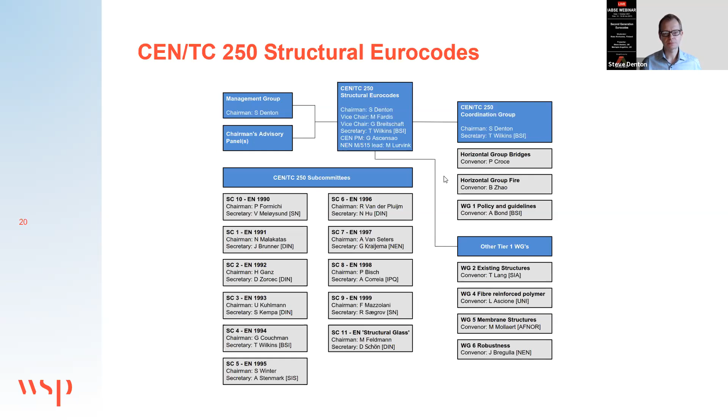Before moving on, one of the important things that I wanted to acknowledge is that the Eurocodes operate as part of a family of European standards. So the Eurocodes are the documents that cover design, but they work in conjunction with the European standards for products and European standards for execution, so construction specification documents. The interdependence and interrelationship between those different standards is very important, and something which has been a real focus for us in the evolution of the Eurocodes.

Now let me move on and just briefly talk about that point about why design standards matter, and share a little bit of my perspective on these points. As an audience that's chosen to attend this webinar, you probably share my perspective that design standards are important. But let me talk a little bit about why I think that's the case.

The first point is about impact. I've already talked about the fact that the Eurocodes are used by somewhere over 500,000 engineers. The impact of what we do is profound in developing these standards. Sometimes it feels quite daunting, but I think it's a huge privilege. How often does one have the opportunity to work on something that is going to impact so many people? Let's remember that construction represents around 10% of most countries' GDP.

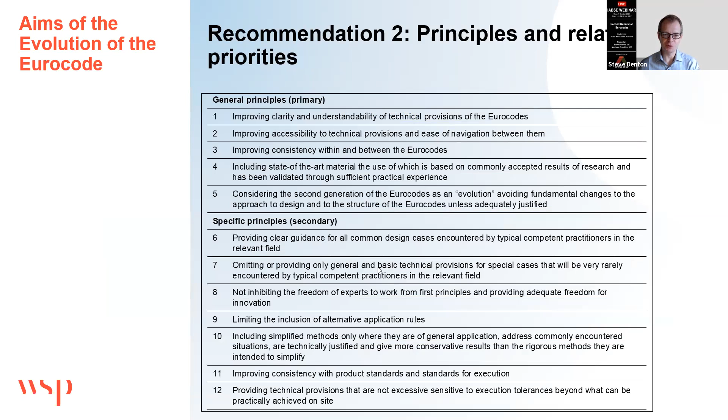Looking at those general principles first: working to improve clarity and understandability, improving accessibility, essentially ease of navigation, looking to improve consistency, looking at state-of-the-art material where importantly, what we include has been validated through sufficient practical experience, and also more broadly, recognizing the need for the second generation of the Eurocodes to be an evolution.

So there aren't too many fundamental changes, unless, of course, there's adequate justification for doing so. In some parts, the changes to the Eurocodes are more significant than in others, but in each case there is a very strong justification for the changes that we're making.

Then there's a set of secondary principles. Sometimes we find that some of these principles pull a little bit in opposite directions, and sometimes it leads to some very meaningful debates about exactly what we should be doing. But what we have done is established a framework, one that everyone has agreed, that gives us a basis upon which we can have those discussions.

And then those remaining three pillars: ease of use, strategic performance measures, management, governance, and support. There's a number of things we've done: the appointment of a technical reviewer, again through international competition, which is the role that Mario Pia has; the detailed review of deliverables; the development of guideline documents; provision of examples and advice. Mario Pia will add a little bit more detail to this.

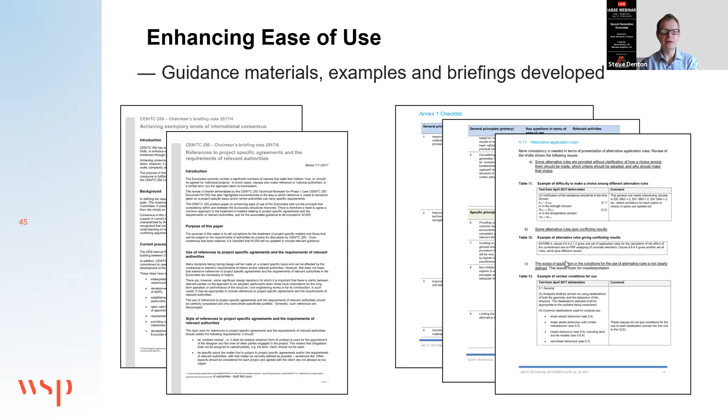We've set out a guide on what good drafting is. Drafting of standards is a very, very skilled activity. So, for example, here we set out a set of 6 tests that we ask people to ask themselves as they are working on drafting documents. Mario Pia will talk a little bit more to that when she speaks.

And what does this look like in practice? I don't have time to go through lots and lots of technical detail today, but just as an illustration of a few things that we've sought to do: on the left-hand side of the screen, you can see the text from the current EN 1990, and on the right from the inquiry draft of the new EN 1990 basis of design Eurocode.

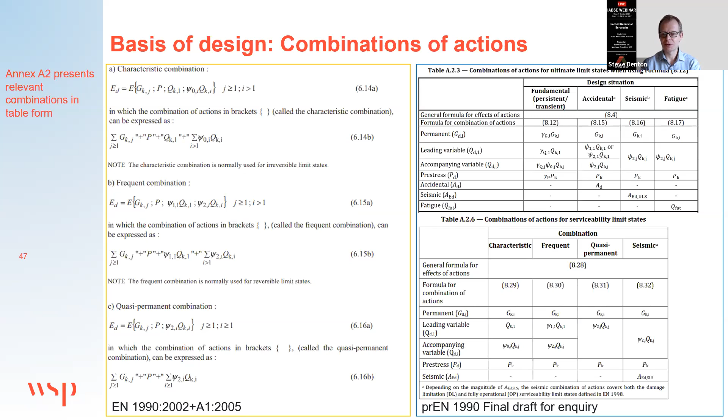One of the things we've sought to do is, we still do in the new Eurocode have expressions for how actions are combined, but we've also sought to give users something a little simpler and a little bit more intuitive in terms of providing these tables that express how the partial factors and combination factors should be constructed in different combinations of actions.

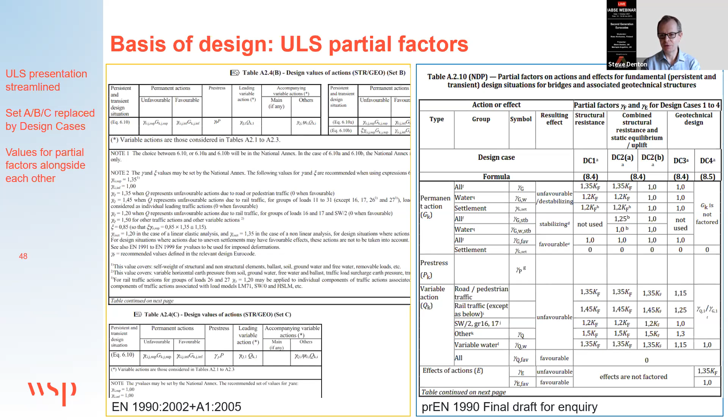Another effort to enhance ease of use has been around the way that in the current Eurocode suite, we have what are referred to as Set A, B, and C of partial factors for STR and GEO verifications. In the new Eurocode, we have created what we call design cases, so we can set out all of those factors in a single table, and the differences are then much more transparent between them.

Another illustration around consistency and navigability: in the current Eurocode suite, we introduce the possibility of differentiation of partial factors by reliability class. But at the moment, that sits within an informative Annex B, and its connection to the other parts of the document is perhaps not as clear as it might be. So in the new drafts, what we'd look to do is make that much clearer within the relevant parts of the Eurocode.

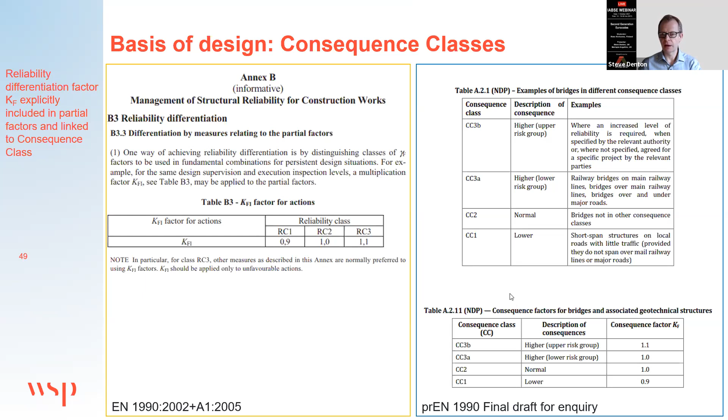I talked about that connection with product standards. For example, in connection to bridge design, a new annex deals with design of bridge bearings, which interfaces much more clearly and better with EN 1337, the product standard for bearings. We've been working well with TC 167, who have responsibility for those documents, to make sure that interface is as effective and smooth as possible.

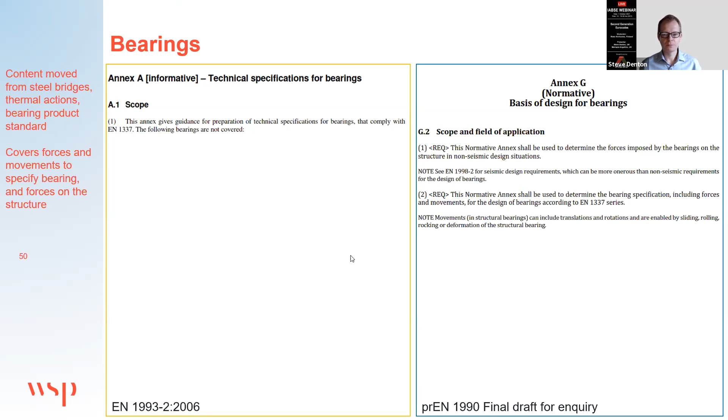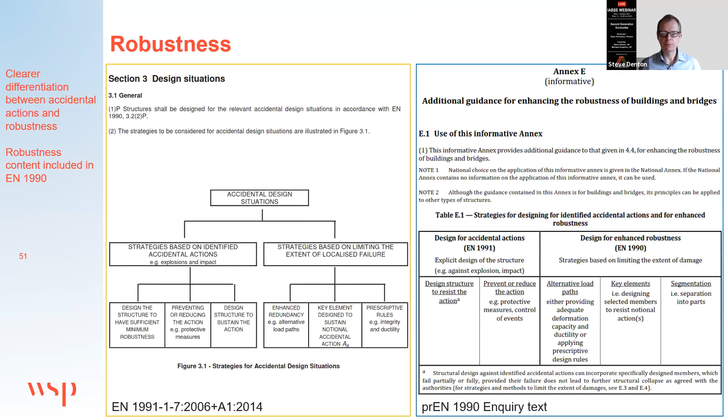Another illustration: the treatment of robustness is a really challenging area in standards. We currently set out in the existing suite a set of strategies for dealing with accidental design situations in EN 1991-1-7. Within the new Eurocodes, we're seeking to be clearer in terms of where these matters are handled from a robustness perspective in EN 1990, in contrast to dealing with defined accidental actions, which we're handling in EN 1991.

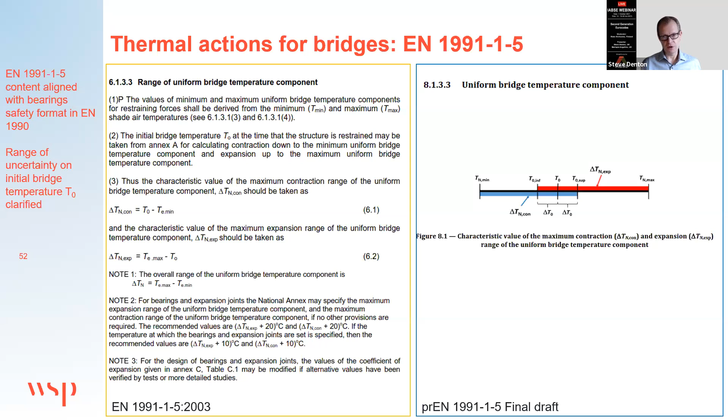Another example of things we've learned through feedback and practice: the text on the left deals with bridge temperatures, an important parameter when designing a bridge, around that temperature T0, the temperature at fixity. Of course, the practical reality is that's rarely a single number; normally when you design, you have to design for a range, otherwise you place an undue constraint on the contractor. We've sought to recognize that in the current working drafts of EN 1991-1-5.

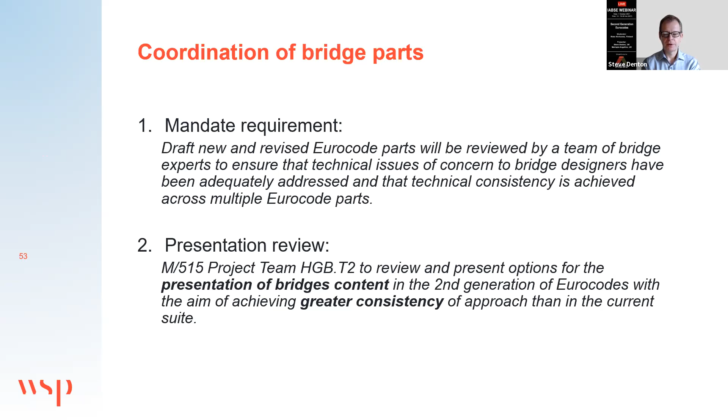One of the other things we've sought to do, and I talked about this horizontal consistency, is something a team has been looking at for the bridge-related parts, particularly how we can have the style of presentation more consistent between the bridge-related content. Many of you will be familiar with the fact that we take a slightly different approach in EN 1992 for concrete at the moment than we do in 1993 for steel, 1994 for composite structures, and 1995 for timber.

The approach, the presentational style, where we have bridge-related content that extends, modifies, augments, or replaces existing content applicable to building structures, the way we do that has been a little inconsistent. So we've developed guidelines for doing that on a more consistent basis. There have been challenges and long discussions, for example, about where that content should be housed.

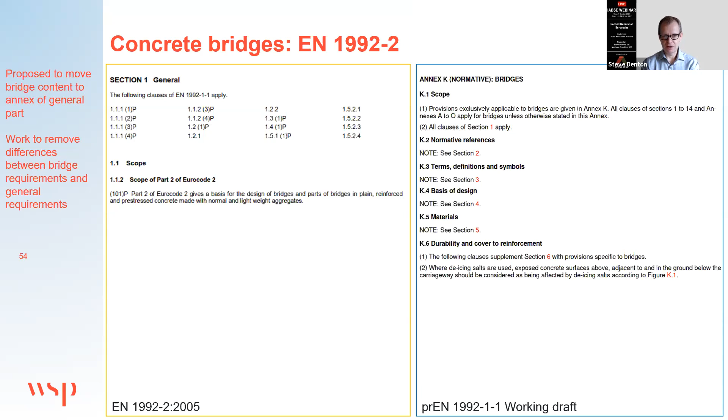Actually, what we found during the review process is that quite a lot of content that was in some of the bridge parts can be applicable to other forms of structures, and a lot of that has migrated into the general parts for the second generation of the Eurocodes, meaning the bridge-specific material in some cases is much shorter. As a consequence, we've agonized long and hard, but come to the conclusion that certainly for concrete structures, it makes more sense for that material to be contained within an annex rather than a separate part. That was a long debate around the right way to handle that.

So that's a little bit of an illustration of what we've been doing in terms of enhancing ease of use. Again, Maria-Pia will talk a little further to that.

Let me talk then about achieving exemplary levels of international consensus. It's my job as chairman of a CEN technical committee to abide by this part of the CEN internal regulations. I have to confess, when I first read this, I'm not sure whatever it was, 12 or so years ago, but I don't think I really understood that.

In a way, this sense of trying to achieve consensus versus unanimity is something we've really evolved in how we approach within TC250, in a very constructive fashion. What consensus means is arriving at a point where, although the outcome may not be everyone's number one preference, it's a position everyone can stand behind. So in the end, you hopefully get unanimous support, but it's unanimous support based on a consensus position that everyone can support, rather than necessarily everyone's number one preference.

We have set out how we will work to achieve that, including position papers that have been unanimously endorsed by all of the CEN members around how we will work together and the steps we will take to try to find that path to achieve consensus.

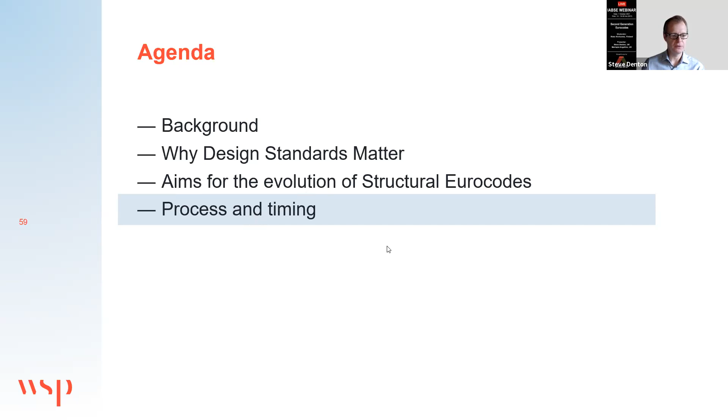A key step in the evolution of the Eurocodes in the second generation was the European Commission issuing CEN Mandate M515, which set out a basis for a funding agreement to support the evolution work. We responded with a technical response, with over 1,000 experts involved in producing it. That response included our proposals for the work to be done, mapped against a series of tasks and subtasks, contained within 4 overlapping phases, so lessons learned could inform the process. There are interdependencies within the suite, and certain documents needed to be handled first so that changes in those documents could inform others. The work needed to be staggered in overlapping phases, because otherwise the program would have been too long.

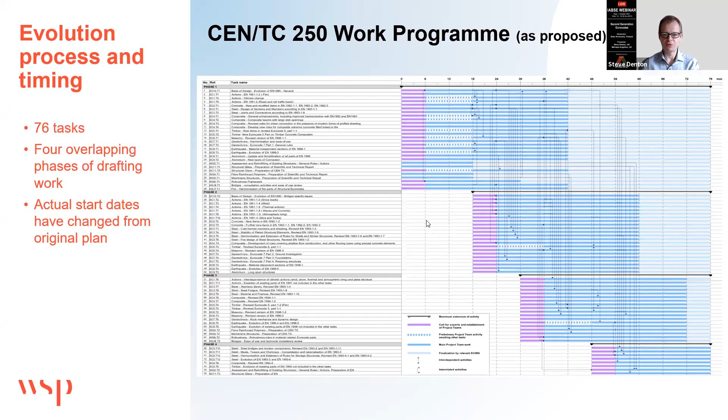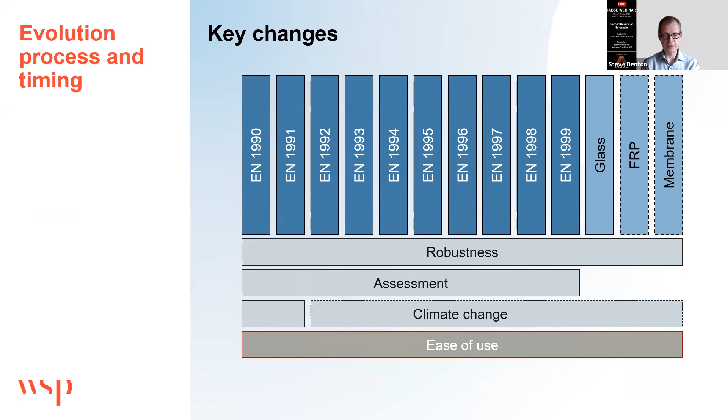In terms of key changes to all of the Eurocodes themselves, there's also the addition of initially technical specifications, but in due course there will be standards on structural glass, on FRP, on membrane structures, work on robustness, work on the assessment and retrofit of existing structures, work around climate change, and ease of use as a key driver for us.

The work we've been doing has not just been a response to that top-down mandate, which defined a series of targets for us, but we've also undertaken systematic reviews of all of the Eurocode parts. All of the CEN members have had the opportunity to comment on the existing standards, and all of this has fed together into the work we've been doing on the evolution of the Eurocodes.

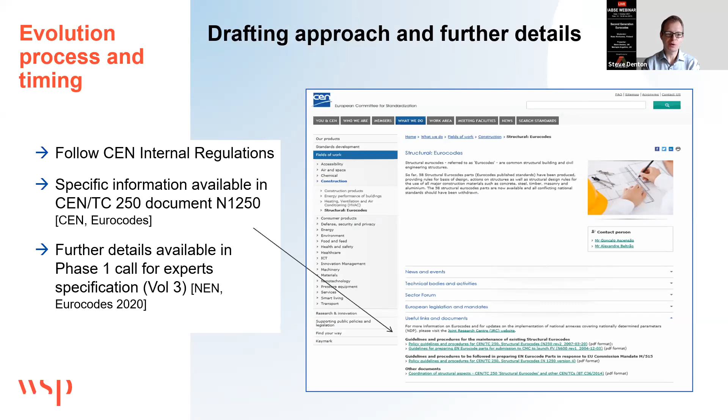If you want more details on how we're approaching this, TC250 document N1250 is a key source. If you Google CEN and Eurocodes, you can get a link to the page where that's contained. Or if you want to understand more about the specification, project teams and what they are doing, you can still access the call for experts. If you Google NEN and Eurocodes 2020, you can get to a page where you can find a lot more details of exactly what the teams have been working on and are working on.

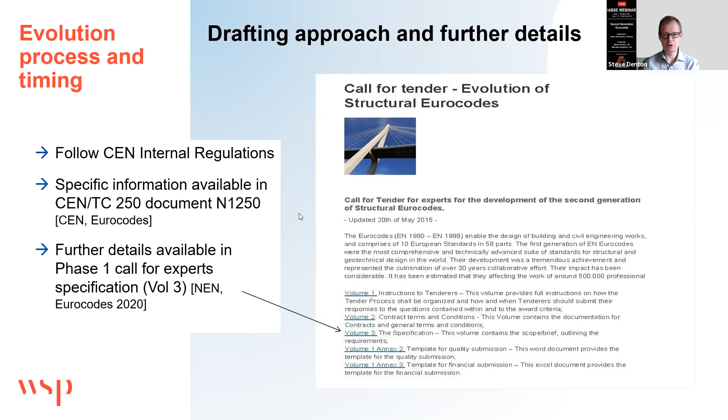So where does that take us to? Looking back and then looking forward, for a timeline: the first generation of the Eurocodes were developed and the final documents published by 2007. What broadly happened over that period was preparatory work for the second generation of the Eurocodes. We then moved into the work on the second generation with these overlapping project team activities. Looking forward, the last standards will be made available to national standardization bodies in 2026, and importantly, there's an obligation on those national standards bodies to withdraw the first generation of standards by 2028.

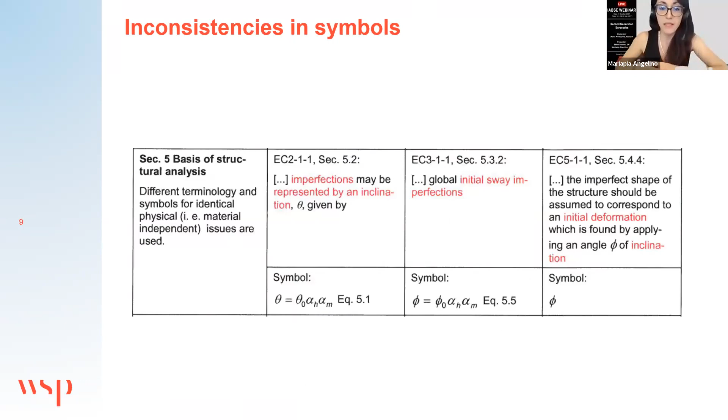There are inconsistencies at the moment that we have identified in terms of symbols and definitions. You could see here that different terminology, for example, is applied for identical physical issues, and that is not helpful, particularly if you're using standards like 1992, 1993, 1994 composites. How the interfaces are managed sometimes doesn't work very well.

Verb form is another area where we have spent a lot of time to solve the way in which content is presented. In several places, the verb form used is not correct, and this is not just a grammatical or academic issue. It really is a problem of presentation of what is a requirement that has to be followed, and what instead is advisory content - where there are just different options to do something, and from a designer's point of view you can choose the relevant one depending on the circumstances.

The distinction between requirements and advice was a really important one, and you can see here a couple of examples where you're providing a requirement. In the first one, it's presented as a kind of fact, given in a table. In the second one, it is a note, but it contains a recommendation which in principle should be followed unless adequately justified. So we are sorting these issues out in the second generation of Eurocodes using appropriate verb forms.

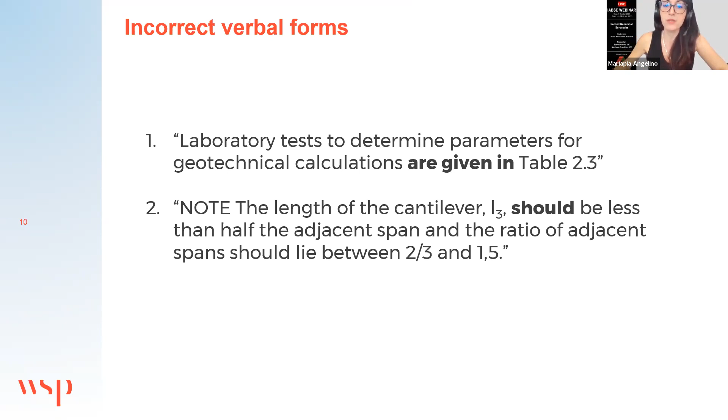Another issue we found is in terms of scope of application of the content. Sometimes it's not entirely clear, particularly if you're using a simplified approach, what the scope of application is. There are different options, multiple methods that can be used, but it's not entirely clear when each of them can be used and what the implications are. Again, this is something we are looking at in detail and sorting out, in order to be absolutely clear on the scope of application of all clauses.

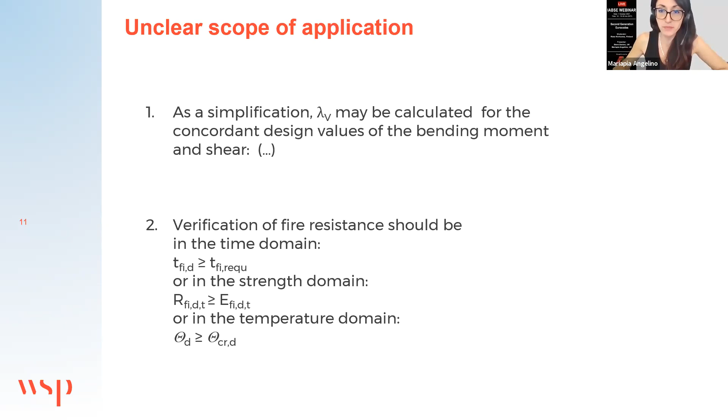From a technical review perspective, Steve was talking about the different pillars and how the vision has been implemented. There was a report, a position paper produced back in 2015, which contained 5 pillars.

But from a practical point of view, we have translated these pillars into some more tangible outcomes. We've got key documents that have to be followed because we have translated these into drafting rules. Some of them were existing, and then we added some more specific ones for the Eurocodes.

We have the inquiry process, the informal inquiry process, and also Steve mentioned that there are a few informal stages done before the formal inquiry, just to make sure that we collect enough comments from the different national standard bodies. Steve has been sharing chairman briefing notes, and I will give some examples later. We are actively managing lessons learned and risks for this work.

This is effectively a major program of work, and in good practice of project management, you have to manage your risks for the 4 phases of the work program. Horizontal and ad hoc groups have been created. This has been really important to ensure consistency, like the ad hoc group, the horizontal group for bridges, the horizontal group for fire, and other ad hoc groups to solve specific technical issues. And finally, my role was created, the role of technical reviewer, which I'm currently fulfilling.

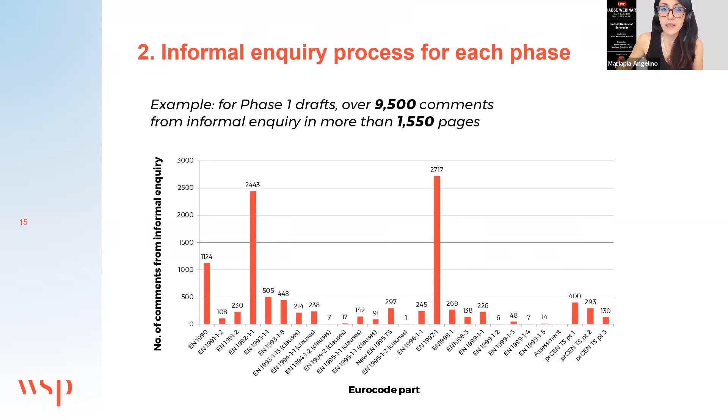Steve is also responsible for sharing briefing notes. So every time there is an issue that is useful to clarify, Steve produces these briefing notes, which are then sometimes used to update N1250 with relevant rules.

And then what I want to present here very briefly are the specific responsibilities that I have as technical reviewer. Overall, I follow the TC250 strategy for enhancing the ease of use.

I review reports and technical deliverables. I've been producing, particularly at the start of my work, recommendations, detailed recommendations on how we can improve the usability of the Eurocodes. I've developed and I continue to develop guidance material, briefings to support project teams, and I also keep a library of notation and terminology to identify areas where more consistency could be achieved.

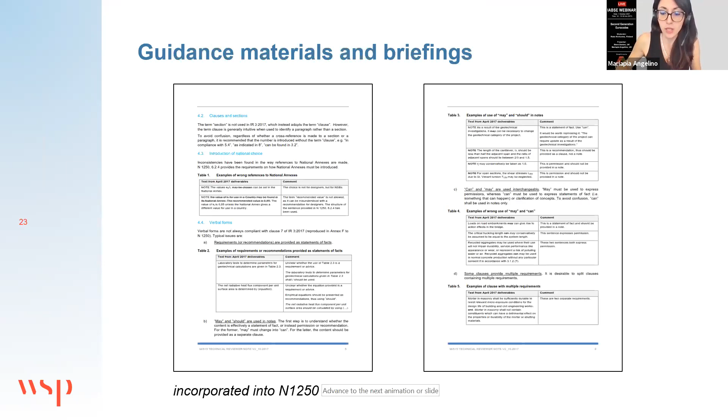And finally, the notation and terminology, the library of notation and terminology. This has been a really useful tool for the project teams and for myself, to ensure that terms were used in an appropriate way, and also to check the usage of symbols. Here you can see a summary of the symbols and terms used for phases 1 and 2 of the work program. Quite a lot of symbols, as you can see here, over 5,600 symbols and over 1,700 terms used.

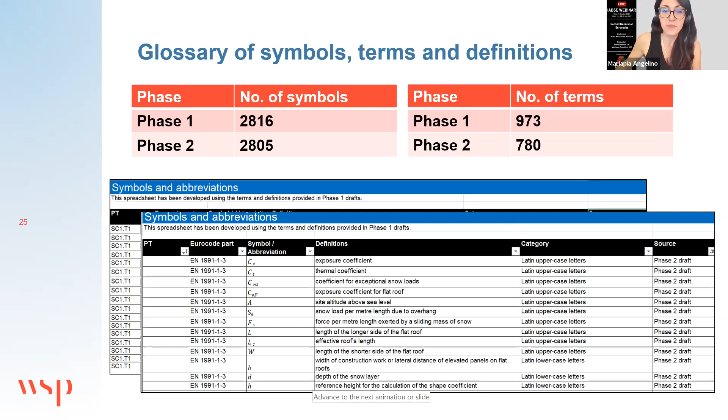So this is the work which is currently ongoing. And to give you an idea of the preliminary outcomes of the work, let me show you some examples, some practical examples, in addition to those Steve shared in his presentation.

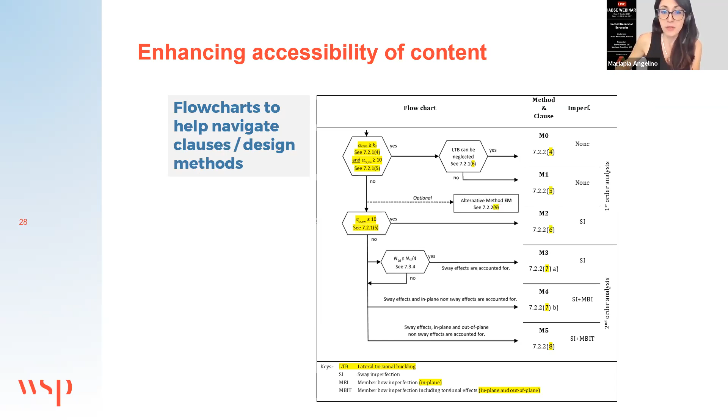Terms and definitions, the glossary also helped identify inconsistencies in how terms were used and to solve them within the project teams or the subcommittees as relevant. So it's just a tool, but if used properly, it does help to remove ambiguity in definitions.

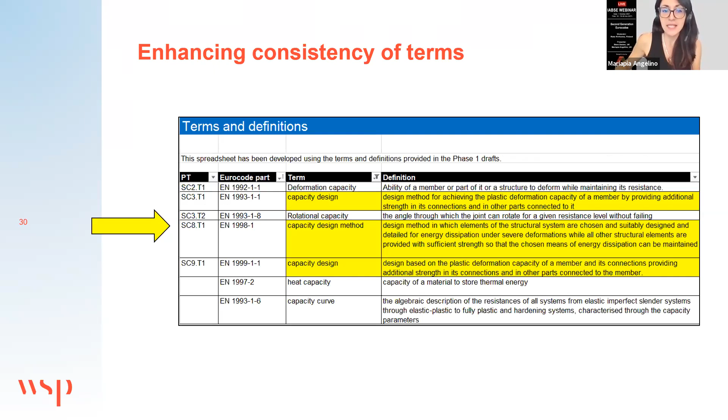So that was to give you an idea of the examples in particular of the work done on this pillar, as well as the management, governance, and support applied. There is also another pillar which is really important for us, and this is on the performance measures.

So we know that if we want to claim that an improvement has been made, we need to have clear measures in place and monitor the application of what we are doing, and check the performance using some measures. So we have defined a few performance measures.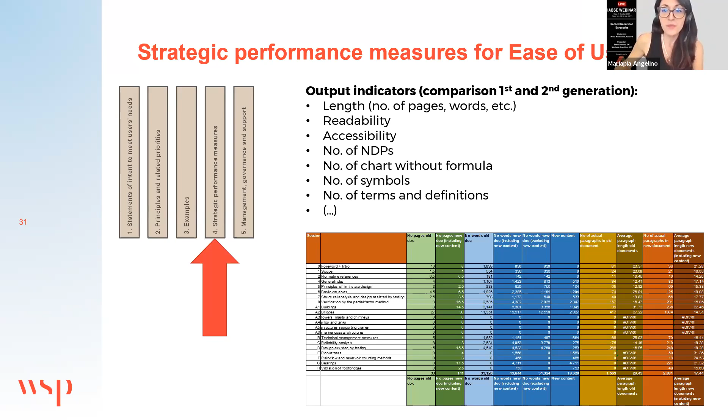And we are producing this type of output, which is used internally for us to check how good we are doing in terms of enhancing the ease of use of the documents, up to now, in the work done in the second generation of Eurocodes. So this was a very quick overview in terms of process and what we are doing to meet one of the key objectives of TC250.

Let me now move on to the publication process, which I assume is relevant for you to know when things are happening and will have an impact on your profession.

In terms of specific steps, once the drafting work has concluded, there is a lot of work that happens later. It's not like once the project team has finished the work, the standard is ready for publication. The subcommittees and working groups review the standards, consolidate the work done by multiple project teams as relevant. There is an internal check done by TC250. Then there is the editing stage, translation into German and French.

And then there is the launch of the formal inquiry stage. And then again, review of the standard to address the comments received, check, editing, translation, and then formal vote. And after that, again, editing, translation. And at that point, the document will be made available to the national standard bodies.